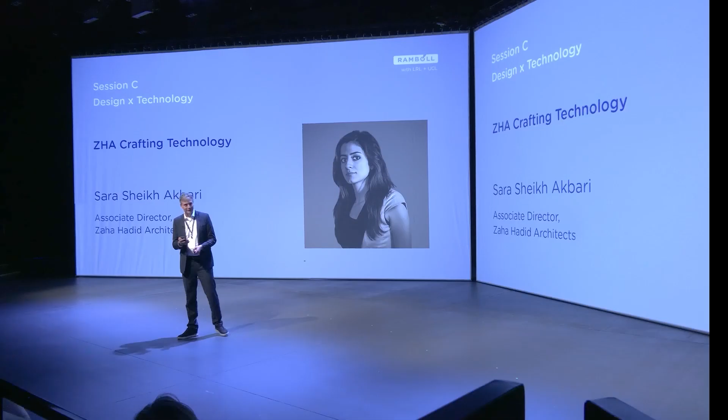Obviously, Zaha Hadid Architects are known for being technology pioneers and the use of technology in their designs. So please welcome Sara. There you are. Thank you very much. Thank you very much. It's a pleasure to be here today.

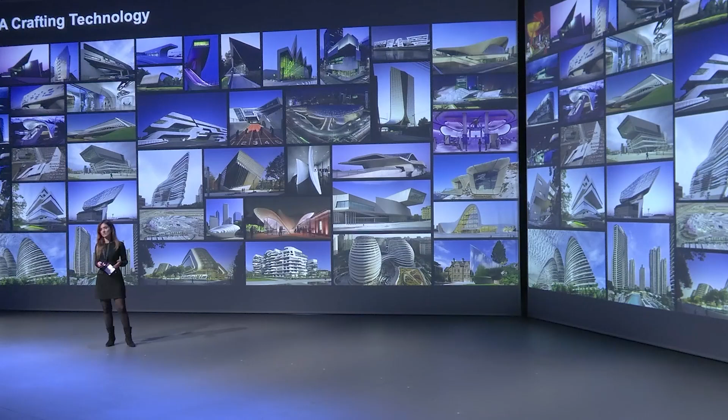I wanted to focus on the dynamic relationship between design and technology through the lens of some of the projects we've developed as Zaha Hadid Architects over the years. Architecture has always been a space where technology and design come together. So sometimes vision pushes technology to move forward. At other times you see technological advancements open the door to new design possibilities. And I would like to run through some of these examples from the evolution of the office.

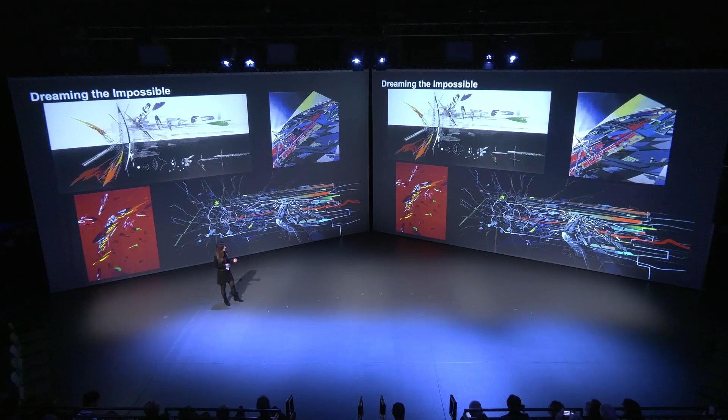So from the very early paintings, Zaha challenged graphic space, the way in which architecture was described at the time through plans and sections only. She was constantly exploring distortion of geometries, understanding of volumes through multiple perspectives, and creating a new understanding of architectural space through dynamic forms, moving away from the orthogonal plane only.

In the early years, obviously, the work of the practice was seen as very experimental. So the vision was there, and it was setting the groundwork for what happened next. But technology needed to catch up and was not ready yet. And it required a lot of experimentation, a back and forth process between the physical models, the paintings, the drawing board, eventually with the 3D software that resulted in the first completed project of the practice, which was the Vitra fire station.

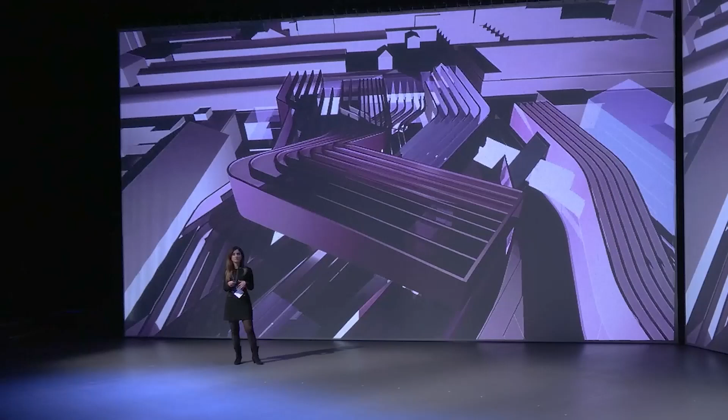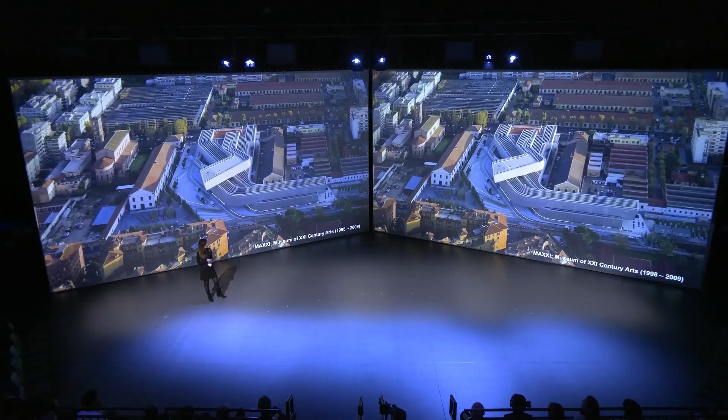From that point onwards, that energy, that culture, it continued in the projects, and towards the late 1990s and early 2000s, technology had started to evolve. The digital tools were more readily available, and this is an image of one of the first renderings of our Maxxi Museum in Rome, which demonstrates that we started experimenting with more complex geometries at the time, and the introduction of curves and splines in the digital software really opened the door to explore dynamic and fluid forms in ways which were not previously possible. So this project completed in 2009.

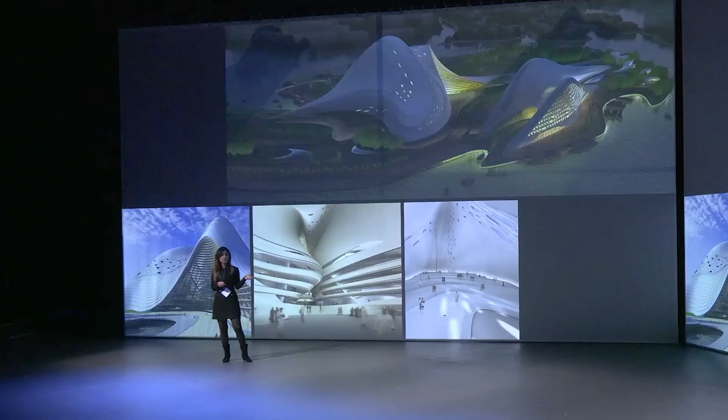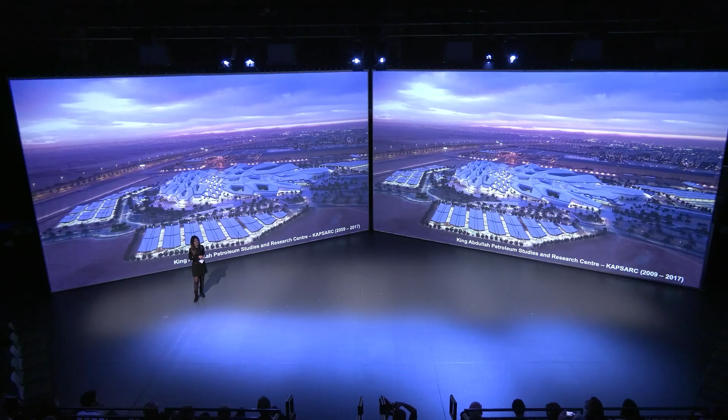And we started thinking through the envelope, like how you deepen the curve, create extra shading inside, open them up, create extra light within the spaces, and integrate the performance with the aesthetic, respond to environmental factors, passive design strategies, how the volumes are defined, placement of the courtyards, optimizing natural ventilation, optimizing shading within the spaces, in our KAPSARC project, which is in the very harsh climate of Saudi Arabia and was completed in 2017.

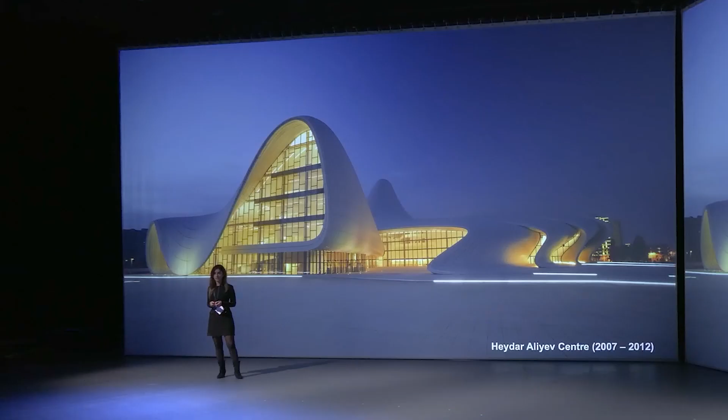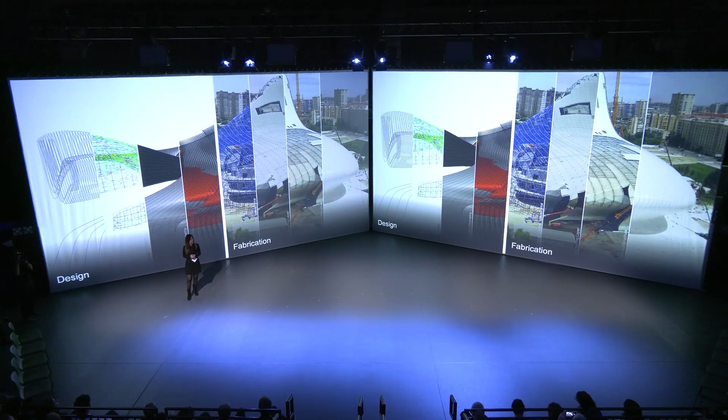It was, of course, about the new tools, but more importantly, this new way of thinking and framework of thinking that allowed us to innovate at the intersection between design and fabrication, and create a more seamless connection between the two of them. With every project, there are so many layers that need to come together for a project to be realized.

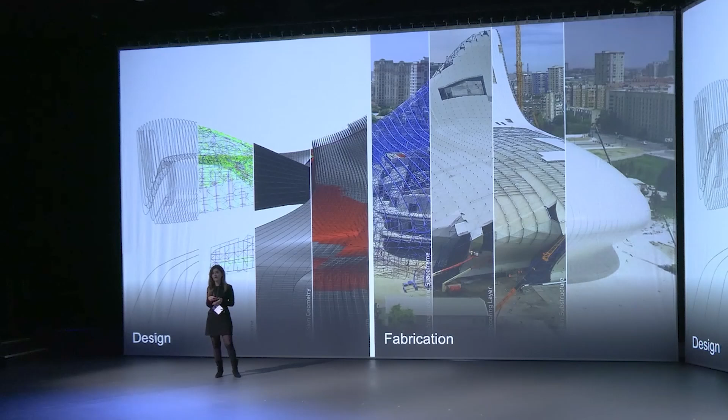And with a project of this complexity, of course, from the early sketches, close collaboration with the engineers, optimizing the structure, understanding of the geometries, the surfaces, the material, its properties, limitations, how that translates into how we panelize the surfaces. And of course, in terms of the construction side, the concrete structure, the assembly of the space frame, the weatherproofing system, which followed the 3x3 meter grid to ensure efficiency and ease of installation, the secondary steel, and the rain screen.

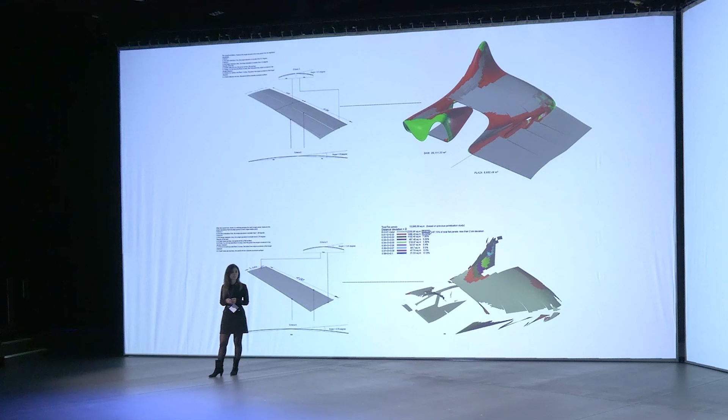And this is not purely about the parametric design, but also, like any point in history of architecture, if we look, it's also the material of the time, the material innovation. So in the case of this project, the use of GRP, GRC, glass reinforced plastic, glass reinforced concrete, opened the door to new opportunities to create these fluid and dynamic forms.

And on the top image, you can see we had to go through rounds and rounds of analysis and optimization of these surfaces, basically digital modelings of flat panels, which you can see in grey. Obviously, you want to increase the amount of them. They're easier to produce versus the single and double curve panels in red and green.

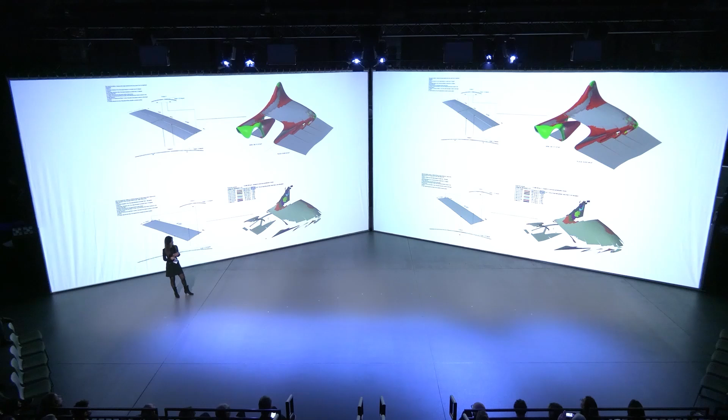And this analysis and optimization was then linked to these spreadsheets. Each panel type was indicated there. Each panel was tagged. And the information was eventually transferred into unrolled and documented panels shared with the specialist consultants and the fabricators for the next level of definition and realization.

And what is important with this project is this is pre the time. Nowadays we have generative design tools, we have different plugins and Grasshopper and all that integrated into the software, readily available to architects and designers to integrate within their design process. This project was completed in 2012, so it's pre that time. So we had to develop bespoke coding and solutions internally to be able to reach this level of optimization.

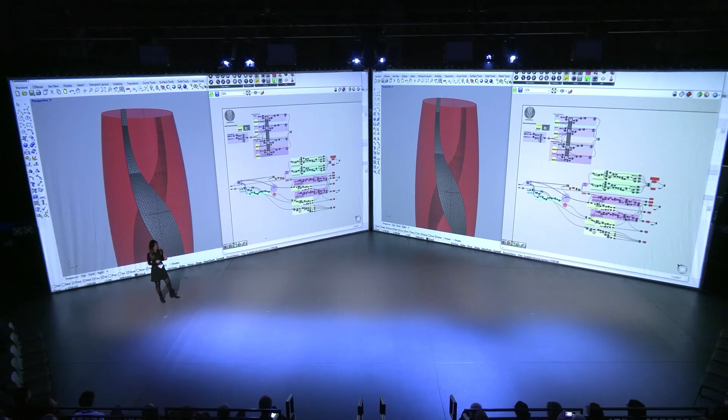And it definitely required a higher level of rigor and collaboration internally and externally to achieve this level. Nowadays, these software are readily available, and what it means is we get to test options with complex geometries at fast speed, really a fraction of the time, look at optimizing structures, run different simulations, and it creates a high level of productivity, which leads to new levels of boosting creativity and innovation in the work that we do.

Before I go over some of the research work we've been developing over the past couple of years, I'm going to show this last project, which is one of the more recent projects completed in 2022, and it links a lot of the points I mentioned with the previous projects together. So it's a project that has been inspired by its landscape as an array of dunes. It's in the desert landscape of UAE.

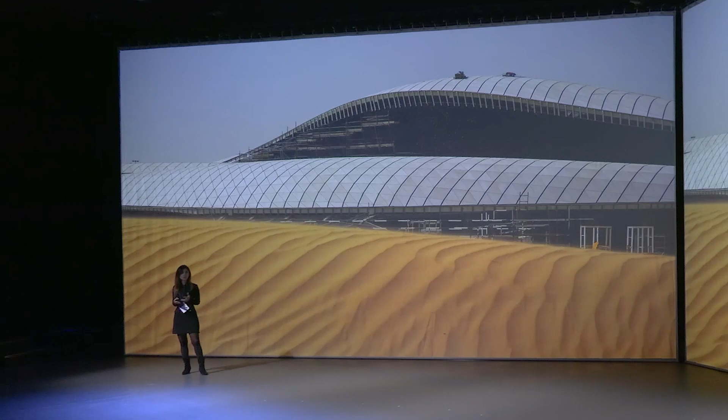And one of the most important elements with this is sustainability. It was an integral part of the project, and it was integrated into every aspect of the project, from the geometry to the formal composition of the spaces to the MEP design, lighting design. And I'll explain some of the passive design strategies to explain how that all came together.

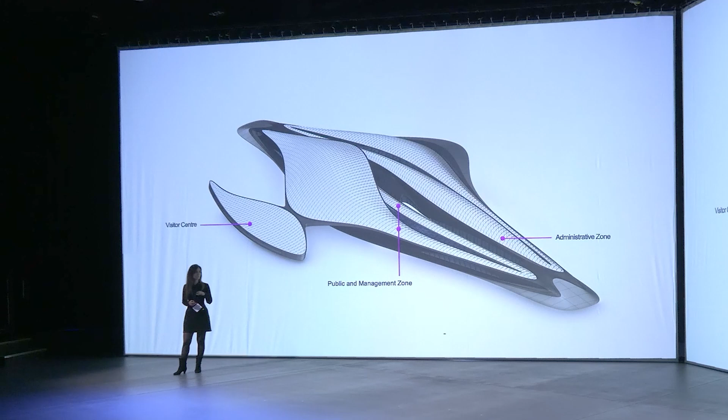So volumetrically, first of all, the volume is responding to the program inside. So you have the most public end of the building, the visitor center, in the north, the most private end of the building, the administrative zone and open plan offices in the south, and then the middle volume, or as we call it dune, in the center, which is public areas on ground floor, management areas on level 1.

And these dune-like geometries split, creating skylights above the open plan offices, creating a glazed facade to the management areas on level 1. At the same time, they start connecting, creating these 2 central courtyards, helping with natural ventilation, maximizing natural daylight within the spaces. We have large overhangs around the building, which create these self-shaded glazed facades.

So this building is responding to its climate. We only have 9% glazing here, actually. But if you look at the interiors in different months, different points of the year, different times of the day even, the interiors are really flooded with natural daylight through these different considerations.

We use fully triangular, completely flat panels, and we had to meticulously design the geometries to ensure that these fluid geometries can be achieved with flat panels, which were locally produced and easily handled to the project site.

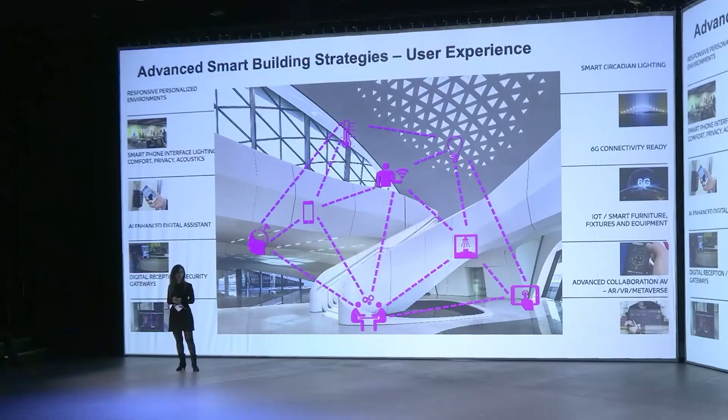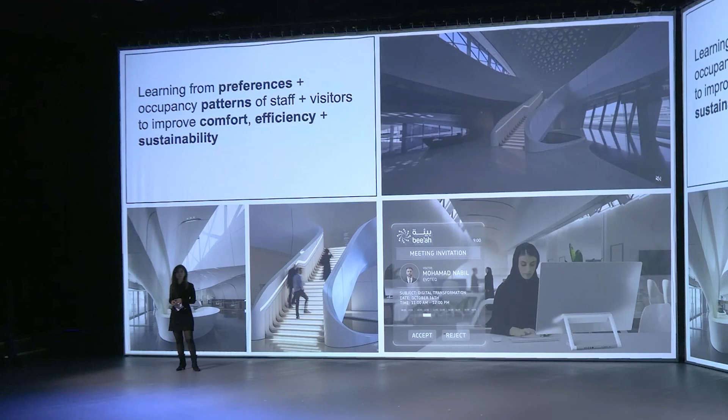And last but not least is the technological aspect of the project, apart from what was integrated into the design process. One of the primary use cases of technology is to create a seamless experience for visitors and staff. Here we have smart meeting management systems, virtual concierge, but on the health and well-being side, a more important element is the environmental sensors throughout the building.

Through them, we're learning from the preferences and occupancy patterns within the building to create a more comfortable, more efficient and more sustainable building. So really looking at a building like a living lab, which is constantly drawing on this data and becoming more efficient over time.

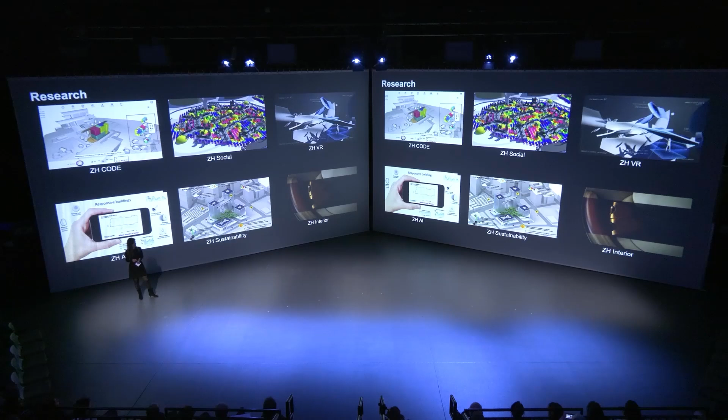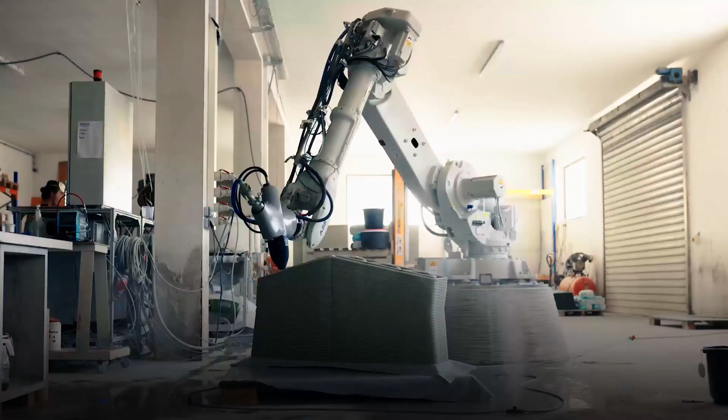As you see with all the projects, research and experimentation is an integral part of what we do, and we're constantly looking at emerging technologies, material design methodologies through our different research teams and through the projects that we develop. The first research project I wanted to show is a collaboration between our computational and design team and ETH Zurich, and it's a footbridge, 16 by 12 meters, constructed using 3D printed concrete blocks.

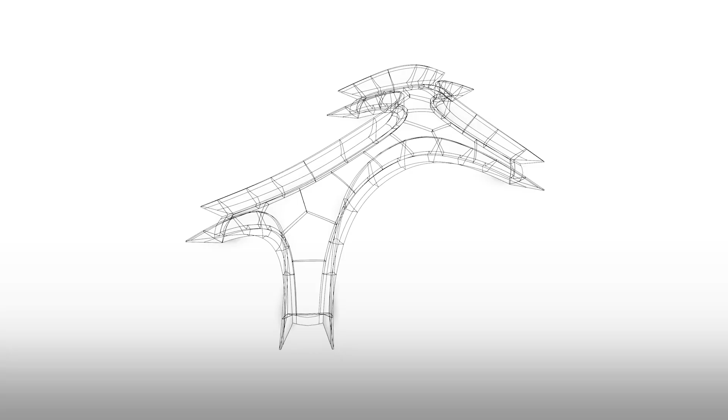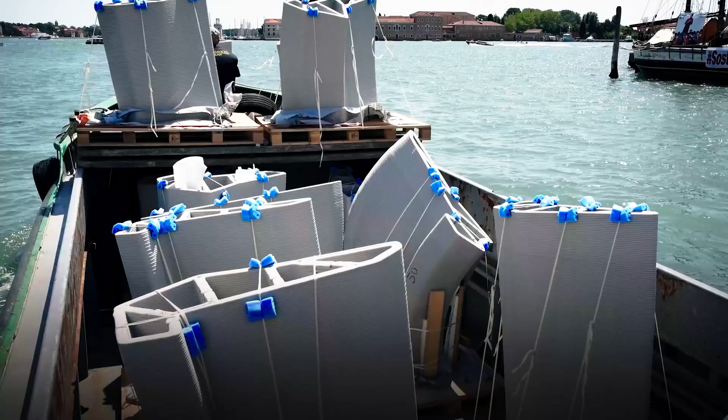These blocks, as you saw from the first bit of the video, have been printed using advanced robotics, and they are dry assembled, so there's no mortar, no glue. Strength is achieved through the geometry, and it offers the opportunity to significantly reduce the amount of material.

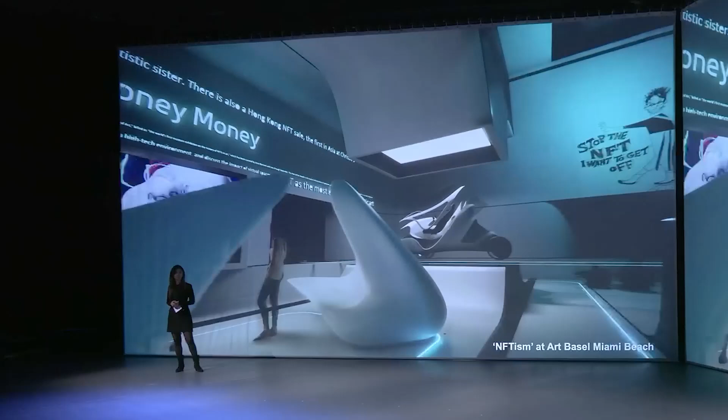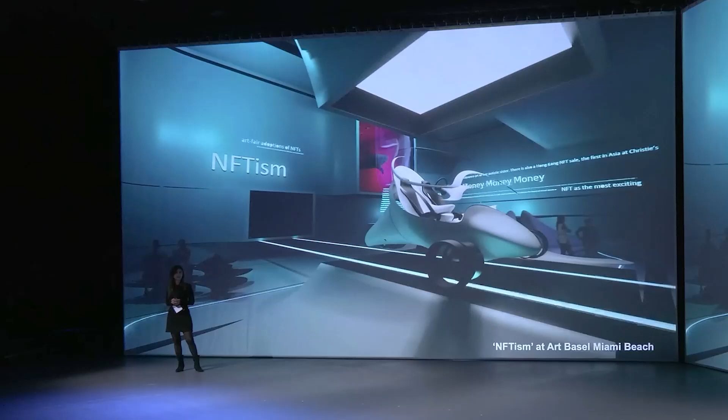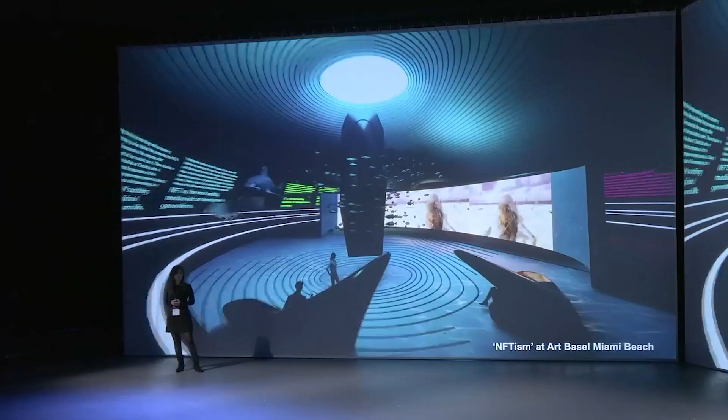Another area of research that we've been looking into, in response to the growing digital interconnectivity, is the metaverse side of projects. This is a virtual gallery we developed for Art Basel Miami at the end of 2021. These metaverse platforms are becoming a place for social interaction, and leading to the pandemic there was a lot more effort in this ground, but the research continues, and it really merges the virtual and physical world.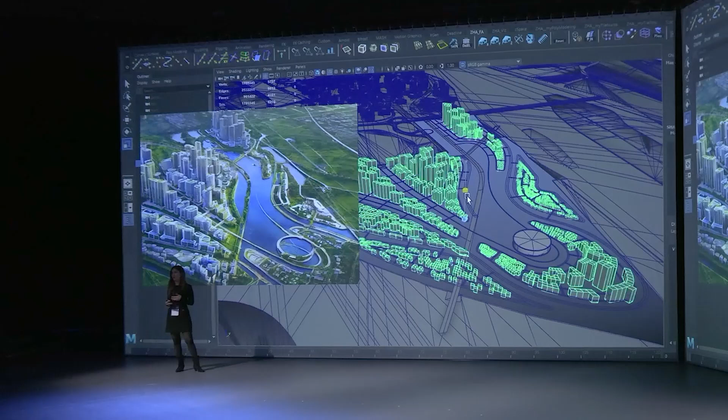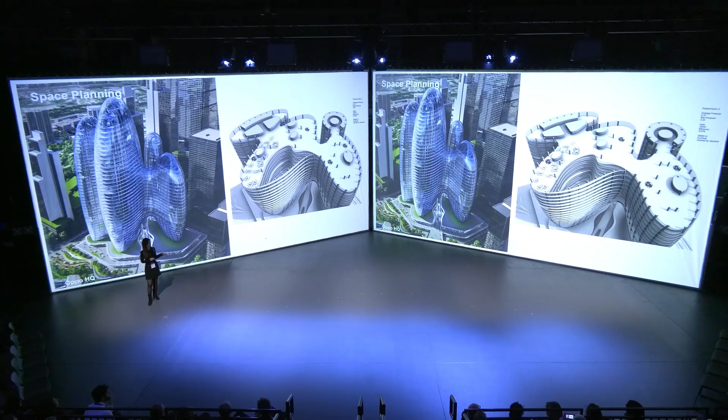With the enhancement in AI, the expectation is to have a high level of productivity and shared information. Through the use of algorithms and tools, we look at optimizing the floor plates, position of atriums, placement of cores, but also connectivity and collaboration within the spaces, finding the most optimum arrangement within different spaces.

Of course, these adaptations need to be implemented now. Soon, I'm sure there will be robotic workstations and opportunities for them to autonomously adapt and rearrange.

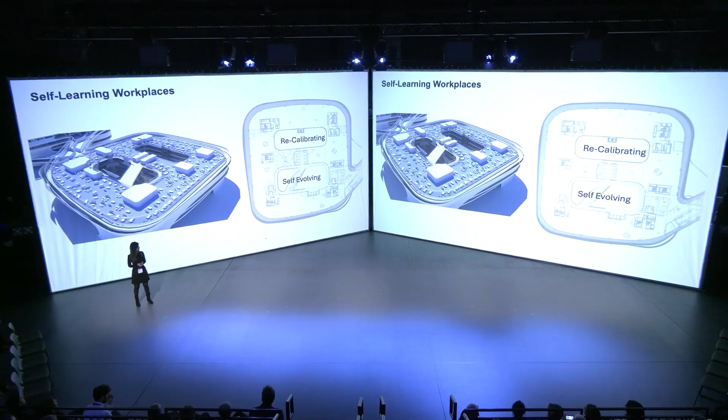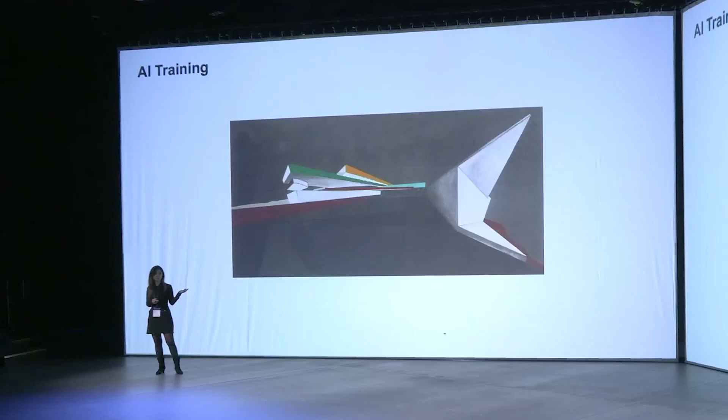We have been looking at training and developing our own AI, feeding in information from the work we are doing, circling back to the early paintings that I showed at the start of the presentation, and generating data out of it. So these last three images are actually generated paintings from that database.

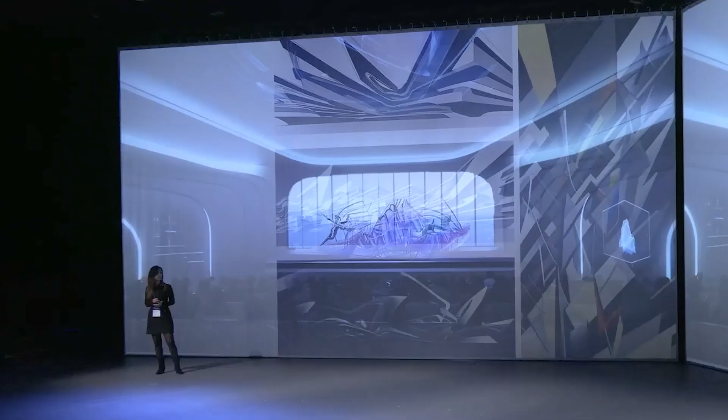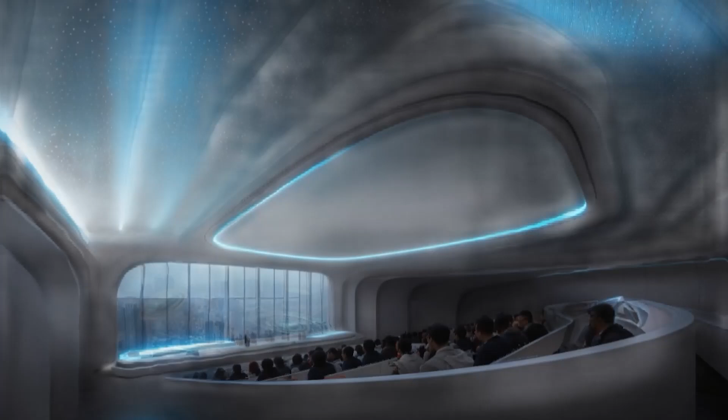AI is allowing us to develop these unique spaces at high speed, a fraction of the time that we had before. What is instrumental is it creates a high level of efficiency and productivity, which always links back to the creativity and innovation that we've been discussing so far. So this ongoing dialogue between design and technology drives us forward with what we're doing.

I'd like to end with this quote from Zaha, that there should be no end to experimentation, which is a guiding principle in what we've been inspired to do and what we continue to develop.